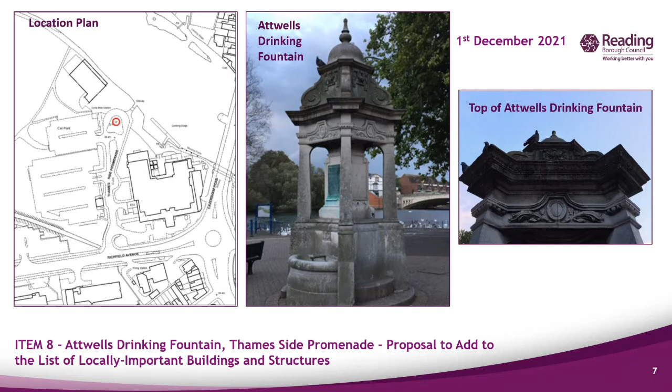But I do think it's really important that we start ticking these off. I think this is an excellent example of something we do need to be locally listing and protecting, given its heritage value that is spelled out on page 55. I'm really delighted, it's a very special item, and I am delighted to say that we could tick off our first local listing item.

Thank you, thank you, anybody else? No, I think silence means everybody's happy with the proposal. I'm really pleased to see it coming forward at this stage, thank you very much for the work on it. I'd just like to say this is the start of an ongoing process, and we're very happy to have the support of the councillors and CAC in formulating this process. Thank you, yes, thank you very much. So if we are happy to, can we see all those in favour of agreeing this proposal?

Thank you, which takes us on to the second of these on page 59. Bruce, to say a few words about this one, the King's Road Gardens. King's Road Gardens, which used to be known as the Huntley and Palmer Gardens, because of its association with the biscuit factory. It was originally intended to be a social club associated with Huntley and Palmer, and the site was set aside with designs put forward for a social club, but this never happened.

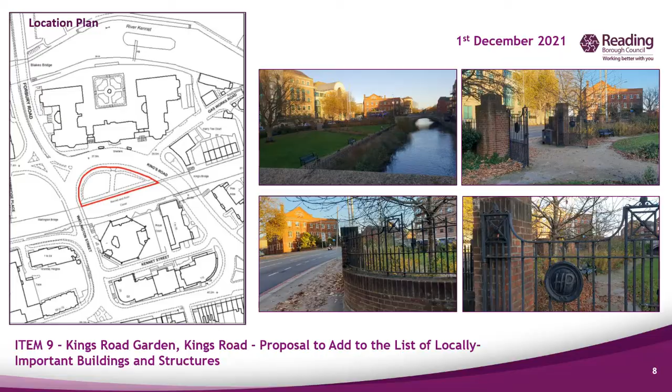Okay, thank you very much. Are there any questions or comments? Councillor Page. Chair, can I warmly welcome the report and thank Bruce Edgar for the work he's done on this and the earlier report and the ones to come.

Can I particularly draw colleagues' attention to page 74 and the paragraph that relates to what happened after Huntley and Palmer's left Reading, because the main building was demolished and subsequently became the Prudential and various other ownerships. The building shown on the top of page 75 is now run by a social housing association, and the land immediately in front was also gifted to the council, now owned and maintained by the Borough Council.

The following paragraph refers to the campaign led in 1994 by local resident Mr. Ted Hancock, who was involved in the campaign that resulted in the successful saving of the building and retention of the garden. I had hoped to see Mr. Hancock here this evening, but he sadly passed away last weekend, so I will be communicating with his partner, who will be pleased to see the decision taken this evening to locally list something he was particularly attached to. So, Chair, bit of sad news, but also welcome news that we are locally listing it.

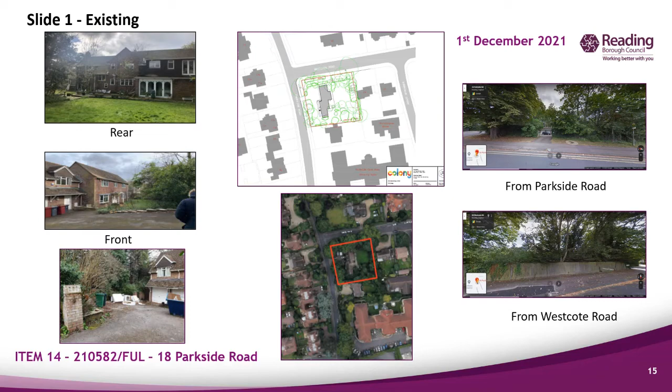Slide 2, please. The proposal is the resubmission of a residential scheme considered by Planning Applications Committee in March of this year. The earlier scheme was for 12 units comprising 3 3-beds, 3 2-beds and 6 1-beds. In summary, it was refused for 3 reasons: in terms of its design, appearance, bulk, height, massing and plot coverage being a harmful addition to the street scene; being overbearing and creating a loss of amenity through overlooking and loss of privacy to number 16 Parkside Road and 29 Westcote Road; and lack of a completed Section 106 agreement.

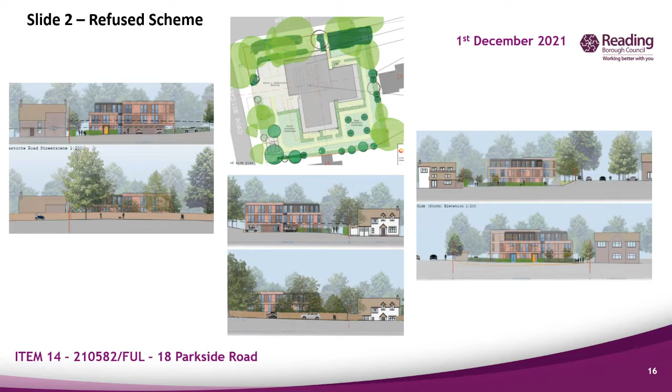Slide 3, please. The initial submission under this current planning application was for 11 units, and following the first consultation period, officers sought some further changes. An amended scheme was submitted for 10 units, which included a reduced footprint, a reduction of the overall mass and bulk of the roofscape, including closest to the adjoining properties, some window amendments, including some obscure glazed windows at first floor to the southern portion nearest to number 16 Parkside Road. This 10-unit scheme includes 8 2-beds, 3 of which would be of a size for 4 persons, 1 3-bed, 1 1-bed, with private balconies, amenity space and communal gardens. There would be the retention of a large majority of the boundary trees, with new trees proposed on the eastern and southern boundaries, and an overall landscape scheme. There'd be 12 car parking spaces, 8 cycle spaces and bin storage, and the proposal would include for PV panels, solar panels to the roof, and an air source heat pump.

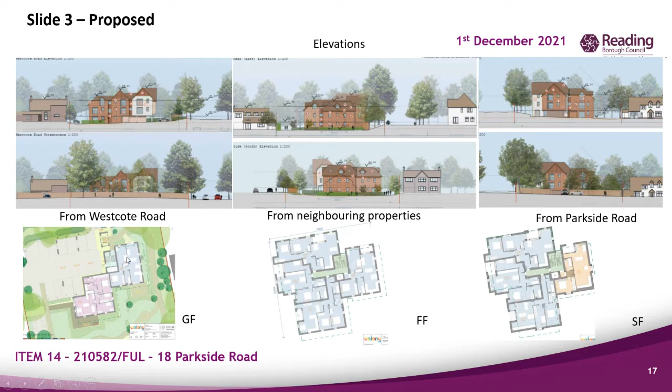Slide 4, please. The residents' main objections, maintained following amendments, relate to the design, the scale and height, the overall density, being overbearing, loss of privacy for overlooking, and the provision of insufficient family dwellings. Each of these matters is addressed within the committee report, but in summary, it should be noted that the overall density is consistent with similar nearby plots and would be just higher, 10 compared to just over 8, although obviously you have to round it down, than the indicative ranges set out in the local plan. There would be a good level of amenity space around the buildings, and the distances to neighbouring properties, as shown on the slide, are not only considered sufficient to not create an overbearing development, but create a similar relationship to number 16, in particular as the existing Parkside care home, which is to the south of number 16.

The combination of a smaller footprint, fewer windows, some of which are proposed as obscure glaze, and resiting of balconies to elevations facing towards the roads are all considered to contribute to addressing concerns regarding overlooking and loss of privacy. The appearance of the scheme has been amended significantly compared to the refused scheme and has a much more traditional appearance, which scales down towards the adjoining properties and is considered to be sympathetic to the surrounding character, making a more positive contribution to it in accordance with relevant policies CC7 and H11. The overall footprint has been reduced compared to the previous scheme, and whilst the height is still different to the properties either side of it, its scale would not be unusual within the wider area, and it is considered it would not be dominating within the street scene.

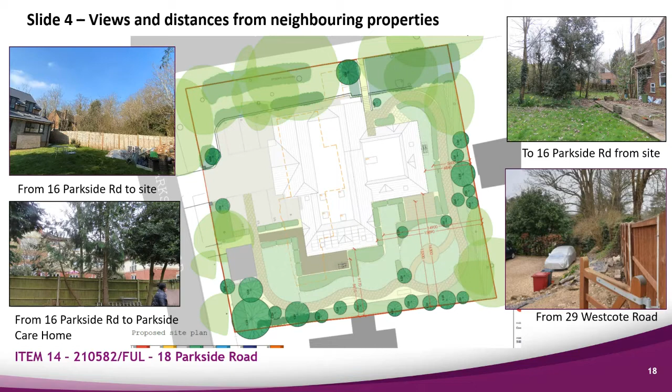Transport has confirmed that parking provision would be acceptable, the overall amenity spaces would accord with policy, and the scheme would, along with a contribution to carbon offsetting, meet relevant sustainability policies. A Section 106 obligation for affordable housing or the provision of shared ownership units on site has been negotiated and agreed, and in addition there would be an obligation for construction skills. Slide 5, please.

Officers are of the view that the proposal is acceptable subject to conditions and Section 106 as set out in the main report and is considered to address the reasons for refusal of the previous scheme.

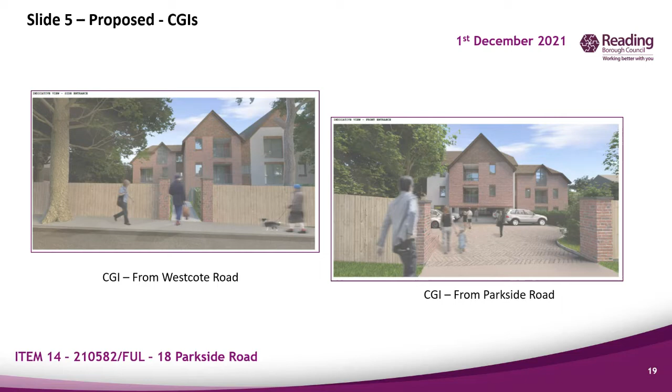The application for planning on this site by the same architect developer was rejected in March this year, as you've heard and as you know, because the building then proposed was deemed to be oversized amongst other things. The building proposed in this application is still substantially the same oversized building as can be seen from the south and east elevation drawings, particularly when seeing the outline of houses at 16 Parkside Road and 29 Westcote Road, which are superimposed. You can't see them on your briefing notes. You have to look at the actual drawings.

The fact is that it is oversized because it has been designed to accommodate 10 or more flats. In summary, the current planning policies and guidelines that have been adopted by our council state that a maximum of 7 could be considered for this site, and 3 and 4 bed units should make up 50%, say 3 instead of just 1, as offered in this application. It is also worth noting that in Reading, 1 and 2 bed flats are now taking more than 5 times as long to sell as 3 and 4 bed flats, perhaps suggesting an oversupply.

Arguments by the architect developer that the site is uneconomic unless the policy limits are exceeded to allow 10 or more flats to be built instead of just 7 means that they have overcommitted in the purchase price to the current owner and or are rewarding themselves too highly, the £1.1 million, the sum of which we now know from the advertisements. Once the planning officer chose to recommend the earlier application of 12 flats for grant, then that same planning officer really had no option but to recommend this case for grant also.

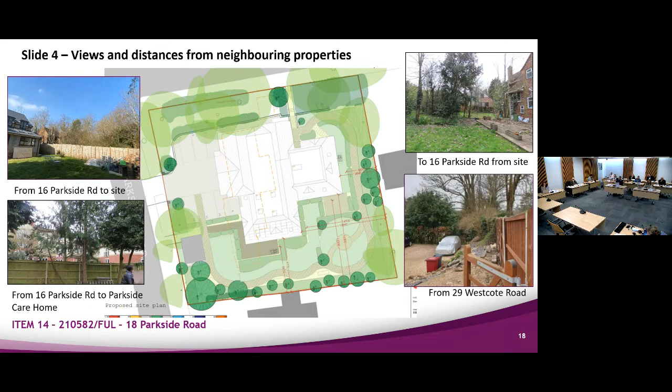In terms of the windows themselves, that's probably on slide 3. If you look at the middle, under the word elevations, you've got the middle two elevations, and you'll see the black dotted outline indicating on the top one the outline of 29 Westcote Road.

And then on the bottom one, 16 Parkside Road. There has been a reduction in the number of windows facing both of those properties, and it should be noted that 29 Westcote Road doesn't actually have any side-facing windows. So for the element closest to them, those windows would be mostly looking directly at the side elevation, which is blank, with some oblique views into their garden, but not direct views.

In terms of the windows facing towards 16 Parkside Road, again there are fewer and smaller windows, and some of the rooms at first floor level on the element closest to Parkside Road, which does have windows on its side elevation - a couple of those are obscure glazed, but they are serving rooms that have got windows facing east and west as well.

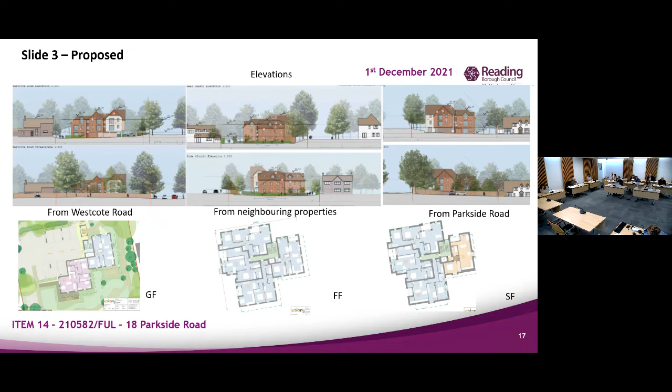Thank you, Chair. I do remember this, the previous application, and I raised the question of bats, as many will remember. I see that there was a report done, the Darwin Ecology Report, October 2021. It would have been good if that had been an appendix within the actual report that came through. But it's interesting to note that it does state a mitigation strategy is in there to ensure that the favourable conservation status of bats can be maintained, and a condition is recommended to ensure that the licence is obtained to allow development.

I understand that in the report they actually found evidence that there were 3 pipistrelle bat roosts using the roof of the building that is proposed to be demolished. My question is, what exactly is the mitigation strategy if you are taking away the actual house where these bats live and the roof where they live? What is the mitigation strategy for ensuring their conservation here? Because you are effectively making the bats homeless by removing this area. Pipistrelle bats need roofs because of the way they manage their temperature, so putting a roosting box on the side isn't really appropriate to this particular species of bat. Just interested in that part, if I can ask.

So obviously the scheme and all of the reports with regard to the bats were reviewed and assessed by ecology. They were satisfied that the information presented in terms of bat boxes or other types of measures that you can introduce within a building would be satisfactory, as long as there was a condition requiring those. I'm not a specialist on bat measures, but they were happy with the proposal and had no objection to it, so I had no reason to consider it any differently in that regard.

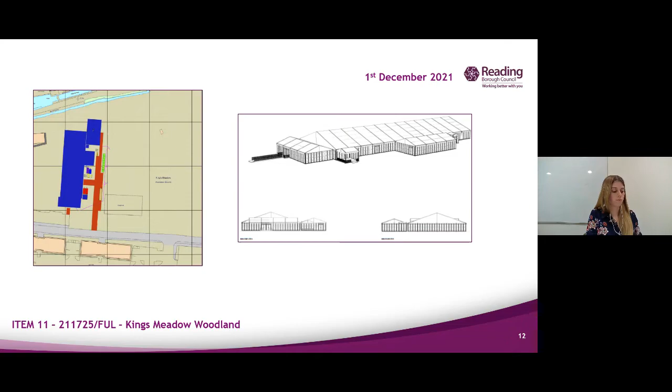Councillor Page, you were indicating. Chair, yes, thank you. I was a member of the Planning Committee back in 2004 when we first approved an application for this use, and we gave it very thorough examination, with a great deal of detail, including the supporting management for highways, the parking, and the management of the event, not only inside the marquees but also outside. Since then, the event has become very established, and I doubt if in that period we've had more than a dozen complaints.

Indeed the concerns initially expressed by residents in the Napier Road flats have proved to be unfounded, and it has been a bit like Reading Rock Festival, an event that is now well experienced in terms of delivering the conditions that we have applied.

I'm therefore happy to support the grant of a further temporary change of use on this site. With the exception of last year, we've had an event every year before Christmas. They've been popular, well run, and have occasioned minimal complaints from neighbours. On the basis of their performance to date, and as the officers said, the conditions are the same as in previous years, I think we can be reasonably confident they will be as well managed as in those previous years. So I'm happy to propose, Chair, that we grant consent on the basis outlined on pages 123 and 124. Thank you.

Councillor Josh Williams, you next, I think. Thank you very much, Chair. I don't want to go over it. I'm happy to second Councillor Page's recommendation.

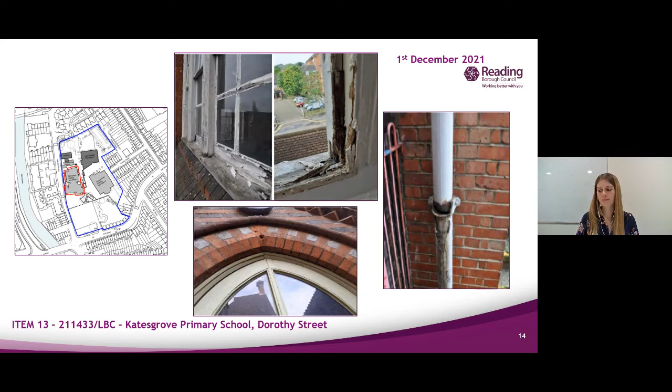Right, okay, thank you. No, I can't. One of the conditions we recommend is that works be carried out by properly experienced and trained craftsmen. Yeah, we are only joking. Touche.

Councillor Rowland, you want to come back? In this case, I'm happy to recommend approval of this, not losing Councillor Page's very valid point about addressing this, because these are case-by-case situations, but the materials and specifications to be approved, I'm going to assume, are carried out by professional officers. I know Mr Edgar is a professional officer and understands the particular materials and specifications required, but I might just reiterate that and possibly even include ward councillors, though I don't know that's necessary. I think picking this up in the future is more important. Absolutely, thank you. Julie's been making copious notes while you've all been talking, so the point is well made, and it's something we need to think about, not just on schools, but on all our buildings. So, at officer level, the councillors' support for the future is very helpful.

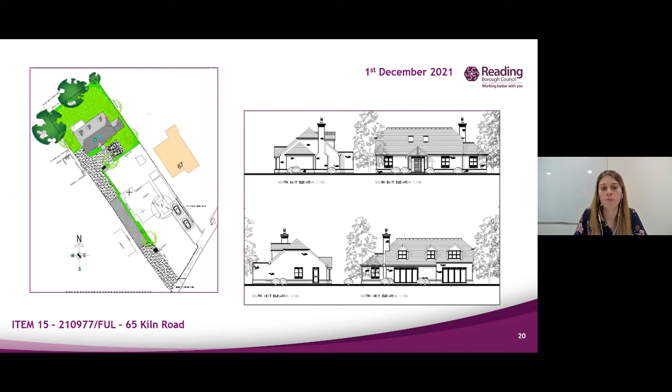This application is for a new chalet bungalow in the rear garden of 65 Kiln Road. As mentioned, the application was originally presented to the Planning Application Committee on the 3rd of November 2021, where the resolution was to defer the application for a member site visit following discussion of a number of matters, namely the proposed access track to the site, impact on neighbouring amenity, biodiversity impacts, and the tandem arrangement with the existing dwelling on site. A site visit was carried out on the 25th of November 2021. Since the previous meeting, a few additional representations have been received, noted in the reports for this meeting, along with further commentary on biodiversity enhancements to the site. The recommendation remains unchanged and is to grant permission subject to conditions. Thank you, Chair.

Members, got questions, comments? Sorry, comments if there are no other questions.

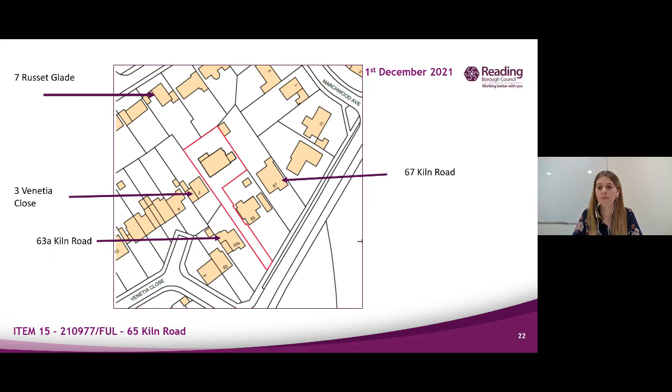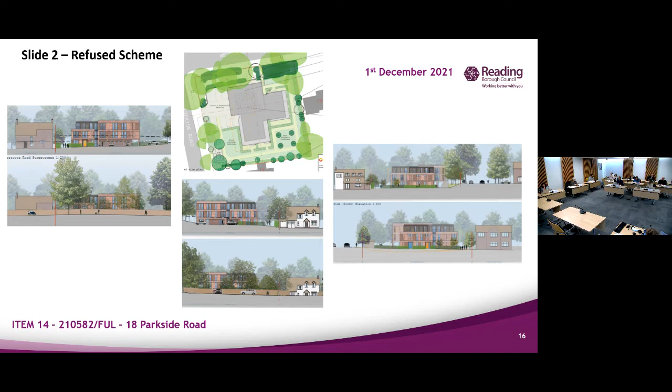So I feel very strongly that this is an example of tandem development, and under policy H11, development of private residential gardens, the policy is that proposals for new residential developments including land within the curtilage or former curtilage of a private residential garden will only be acceptable where the proposal does not lead to tandem development. This is clearly tandem development because it is a dwelling being built behind another dwelling, with the rear building having no frontage and being accessed by a private road or trackway alongside the front building. Clearly what we see before us.

Also, section 5 of policy H11 states the design and layout should minimise exposure of existing private boundaries to public areas and avoid the need for additional physical security measures. The properties to the side, both on Venetia Close and on Kiln Road, feel they are being interfered with by having that trackway down the side of their garden fences, so they feel there is significant detrimental impact to the amenity of their properties, which is point 6. Then point 8, by removing what is currently green shrubs and green grass to the side of the property on the left, that would impact the biodiversity of the site, leading to fragmentation of the garden blocks, so any wildlife in Clayfield Copse, directly opposite, would not be able to use this garden to traverse the local area of Emmer Green.

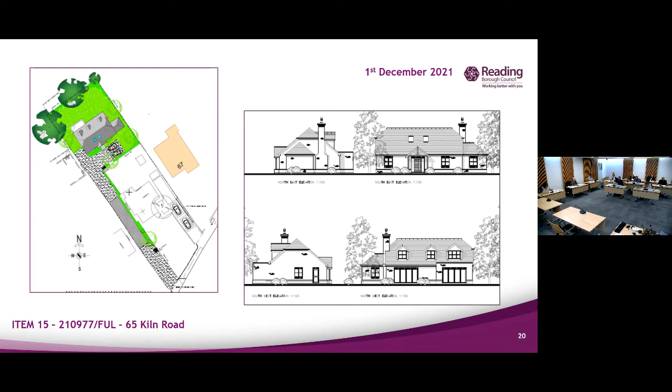Which is an area where we have large houses on large plots. So for all the above reasons, I feel that we should be moving a motion to refuse planning permission.

Thank you. Councillor Rowland, you were indicating. Thank you, Chair.

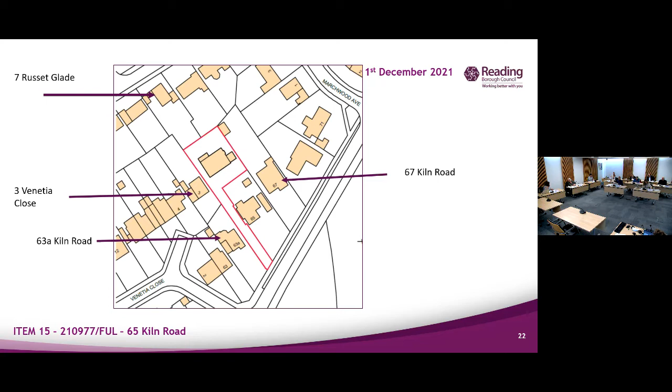The situation with the site, and I did go on the site visit, became to me more one of ensuring that the biodiversity situation on that site was properly mitigated, and that the end result would be a biodiversity net gain, at least, or at least a neutral situation. Taken as it is, and as Councillor Stanford Beale described, the left driveway that we all assumed was a driveway - I think when we were at the last meeting - is actually a 3-meter high bit of shrubbery that runs from Clayfield Copse all the way over.

There seemed to be, also on the understanding that the developer had cleared off a lot of the land, a lot of biodiversity possibilities there, I should say. However, on balance, there would be the possibility of refusing this application if indeed we could not meet all of the mitigating factors for why we have H11.

However, the biggest thing to me, the biggest understanding of this, is that the developer, the owner of that site, can, because there are no TPO trees and there is nothing to stop him, plough that entire property down to nil, put it to grass, and essentially - it's not a loss when you've just got grassland, but we will have lost opportunities for butterflies, for bees, for birds, and things that might be resting in the brush.

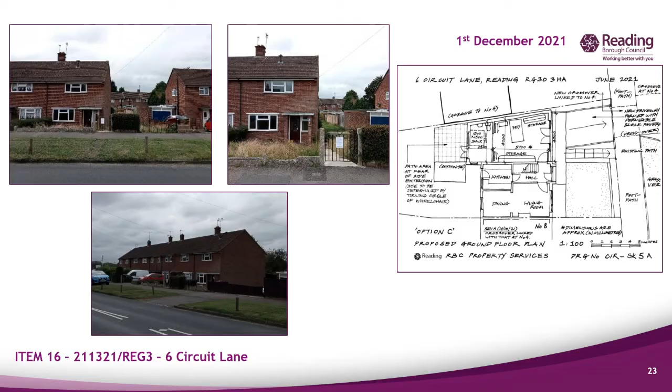Councillor Josh Williams: my thing is, it takes about three presses to come on.

Councillor Josh Williams: Thank you very much, Chair. Thank you to Councillor Ennis for suggesting this deferral. I think the additional information has been really valuable, so thank you.

Just one quick question. 4.2 says that transport officers have confirmed the drop curb shown is wider than it is required for the site. As Councillor Ennis said, I don't argue over inches, but why is it wider than required? Why is it not just the right width as required for the site? I just didn't understand that bit.

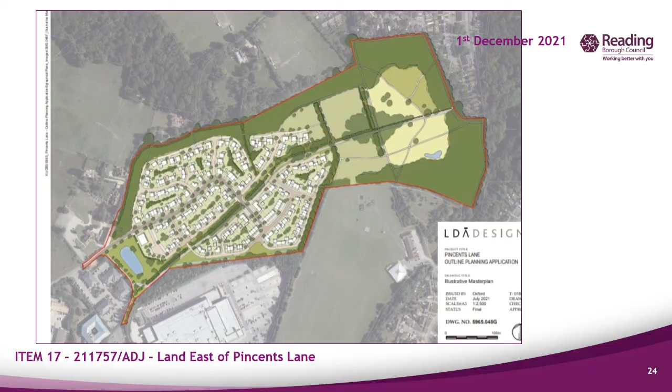Yeah, Darren, can you comment please? Through the Chair, I haven't looked at the exact layout in detail, or whether bus services would run through the site, because that would be for West Berkshire to determine with the application within their borough. I've only looked at it in terms of the impact on our network.

Looking at the site itself and the layout shown in the presentation, it doesn't look as if there is a potential loop that a bus would go round, but the site would have to accommodate refuse vehicles and fire appliances to make sure they can access it. It doesn't look as if there's any specific loop a bus would be able to use. That's all I can advise at this time.

So, Councillor Stanford-Beale, are you suggesting we make a comment, or that they might want to consider this? Maybe we could ask them to consider that. We'll be sending our comments to West Berkshire—it's not us making the decision, but we can pass on our comments regarding that, as we do sometimes about ecological matters and things like that. So yes, we can pass that on.